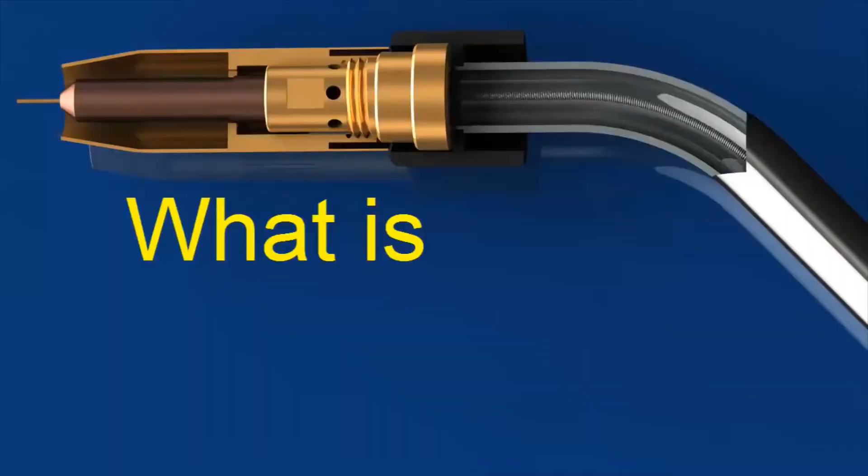What is MIG welding? MIG stands for Metal Inert Gas Welding. The American Welding Society calls this process gas metal arc welding, or GMAW. You might also hear it called wire welding.

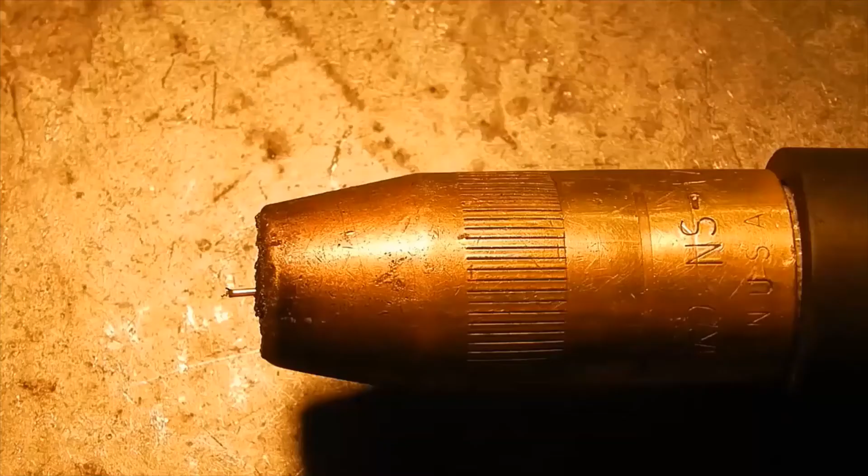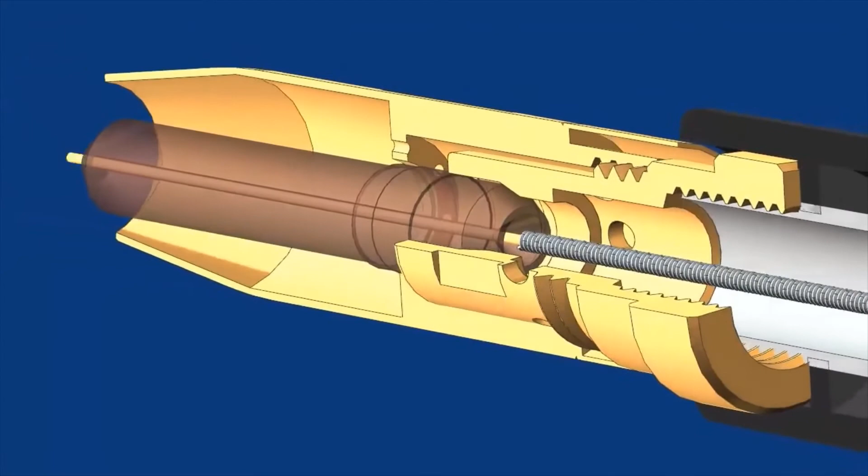In MIG welding, a thin wire acts as the electrode. This wire is fed from a spool mounted on a gun or inside the welding machine, through a flexible tube, and out of the nozzle on the welding gun or torch. The wire is fed continuously when the trigger on the welding gun is pulled.

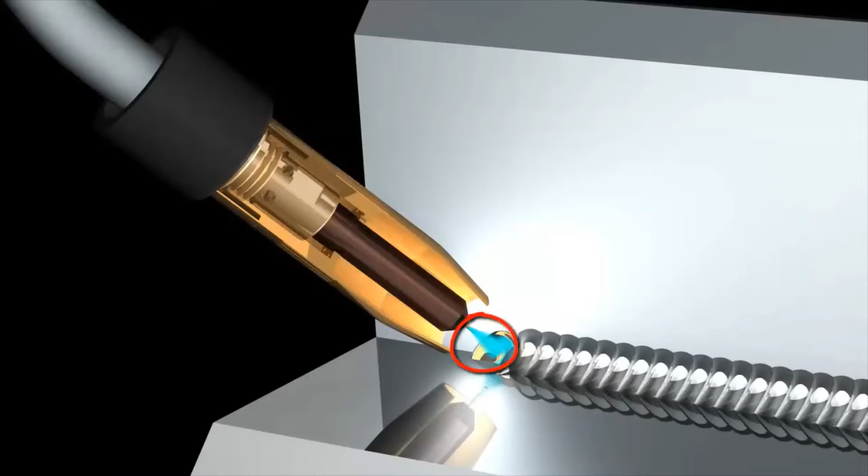When this trigger is pulled, it also switches on the welding current and a shielding gas. An electric arc forms between this wire electrode and the workpiece and heats both metals above their melting point. These metals mix together, or coalesce, and solidify to join the workpieces into a single piece.

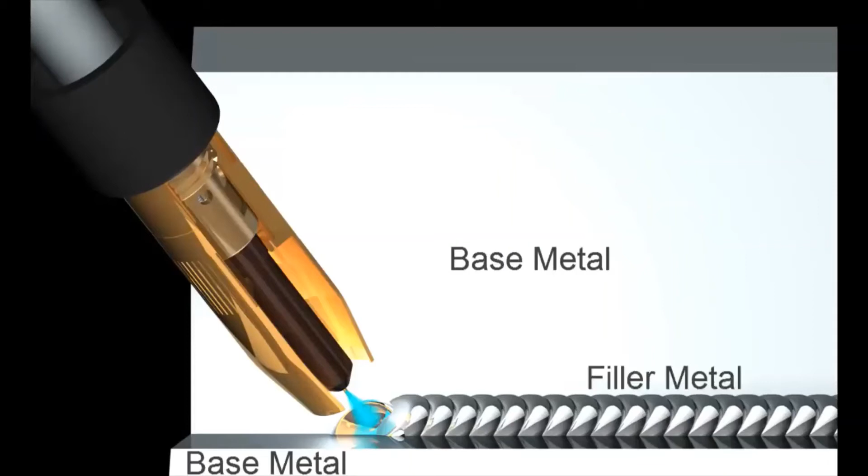The metal in the parts to be joined is called the base metal, and the metal that comes from the melting wire electrode is called filler metal. MIG welding always adds filler metal to the joint. Because the wire electrode melts as it's being used, MIG is called a consumable electrode process.

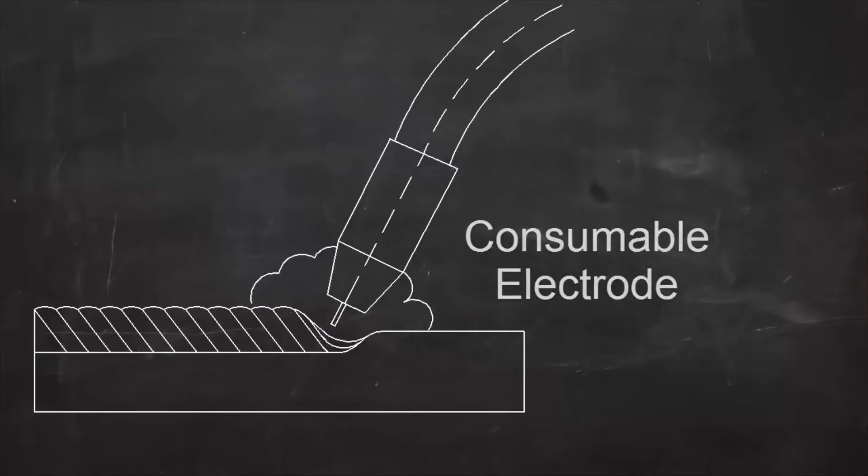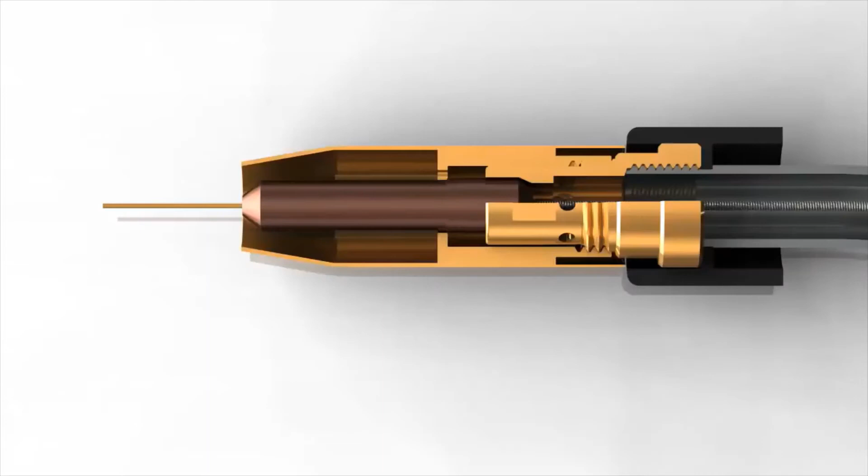Here's the MIG wire going through the wire feeder into a flexible tube, or conduit liner. The liner goes through the hose or welding lead all the way to the torch nozzle. At the nozzle, the wire is fed through a contact tip and comes out at the point of the weld.

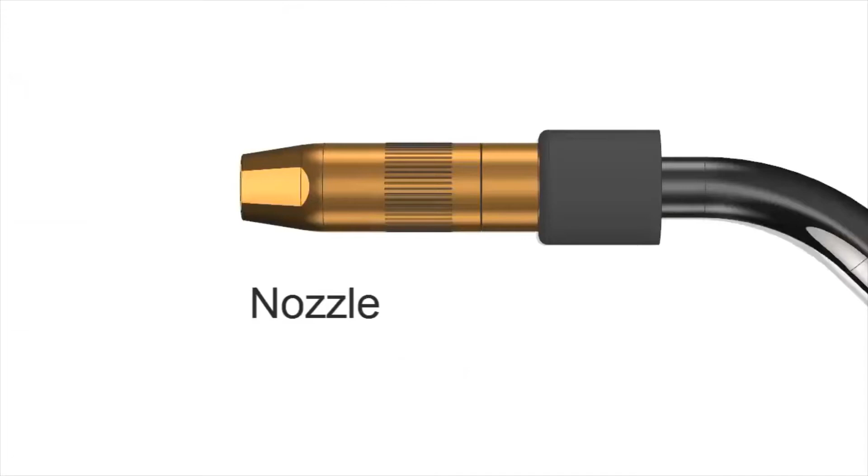Shielding gas is also fed through the welding lead. It goes through a gas diffuser and flows out of the nozzle. This shielding gas, which is often a mix of argon and CO2, protects the molten metal from reacting with oxygen, water vapor, and other things in the atmosphere.

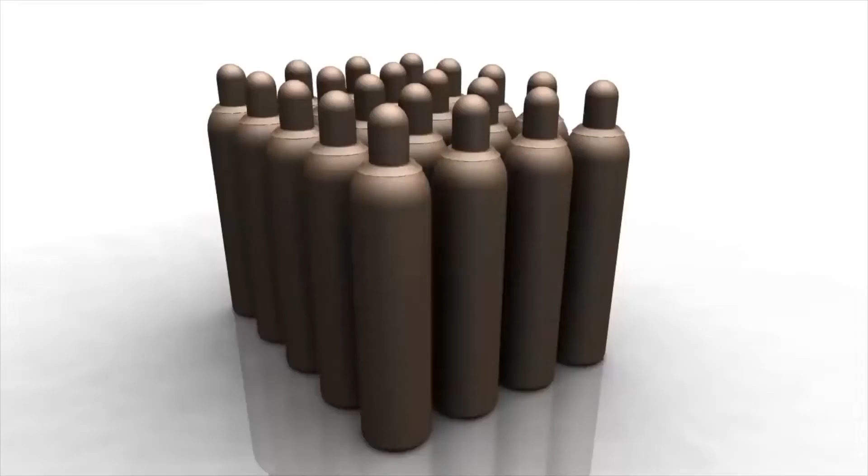The shielding gas is stored in high-pressure cylinders like these. The pressure is reduced to a usable level by a device called a regulator.

In MIG welding, all the machine controls are set on the machine itself. The most important of these are polarity, wire speed, and voltage. The trigger on the gun is just an on-off switch.

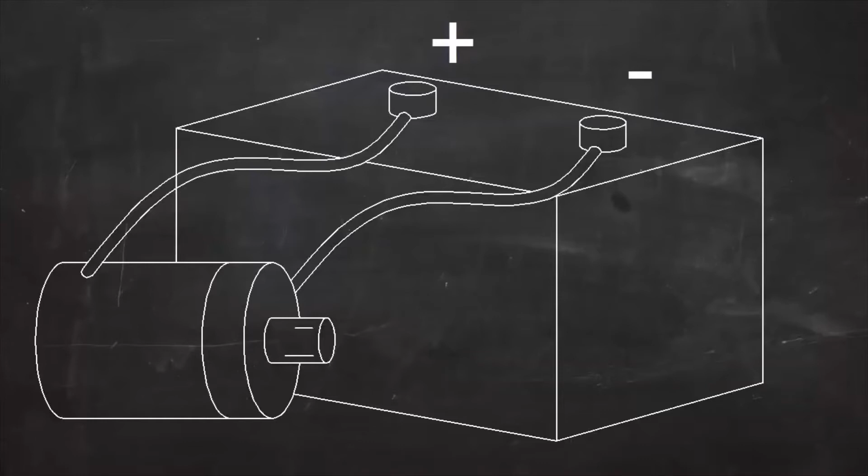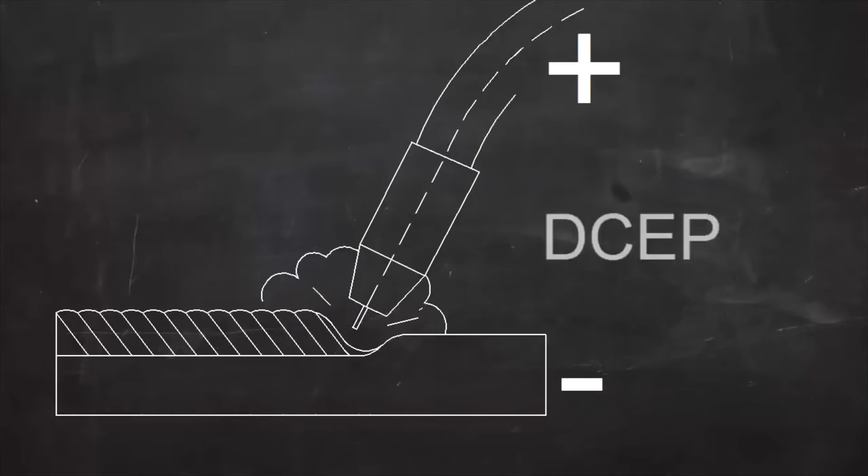For most MIG welding, the current is direct current, or DC. DC is like the current flowing from a car battery. One wire is always negative, and one is always positive. In DC MIG welding, the electrode is usually positive and the workpiece is negative. The term DCEP is used, indicating that the current is direct current and the electrode is positive. This is also called reverse polarity, but DCEP is a more descriptive term.

In an electric circuit, the current flows in a loop. In MIG welding, the current has to flow in a complete circle from the machine to the torch, into the work, and back to the machine. A work lead is clamped to the work to complete the circuit from the workpiece back to the machine.

So, in summary, MIG welding is an electric arc welding process. It uses a consumable wire electrode. Filler metal is added automatically, and the shielding gas comes from a high-pressure cylinder.

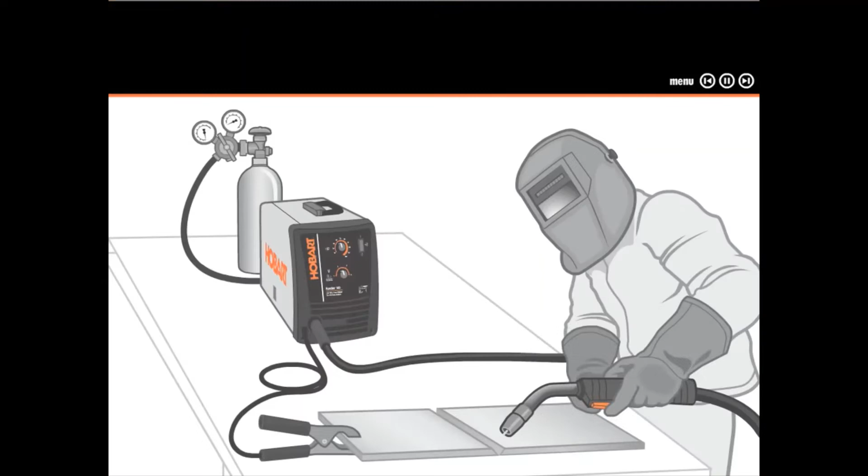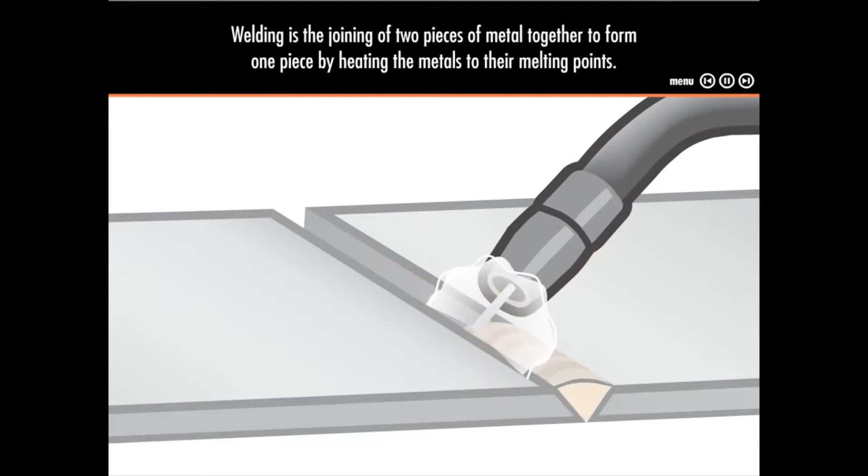What is welding? Welding is the joining of two pieces of metal together to form one piece by heating the metals to their melting points. Additional metal, also called filler metal, is added during the heating process to help bond the two pieces together.

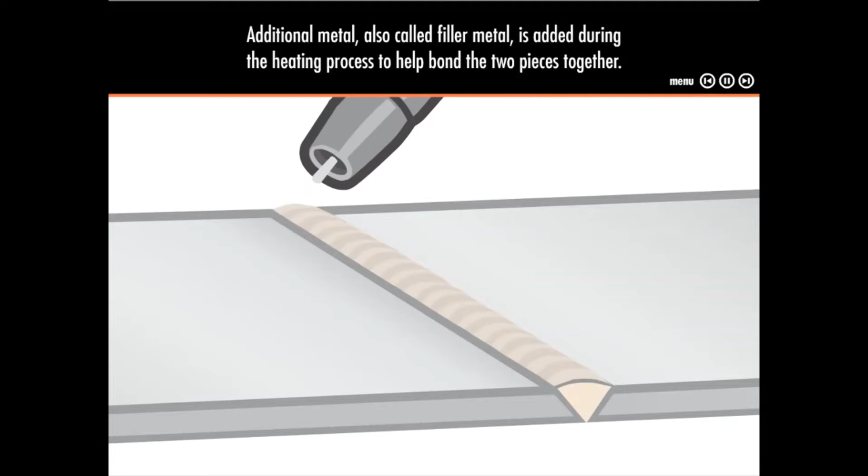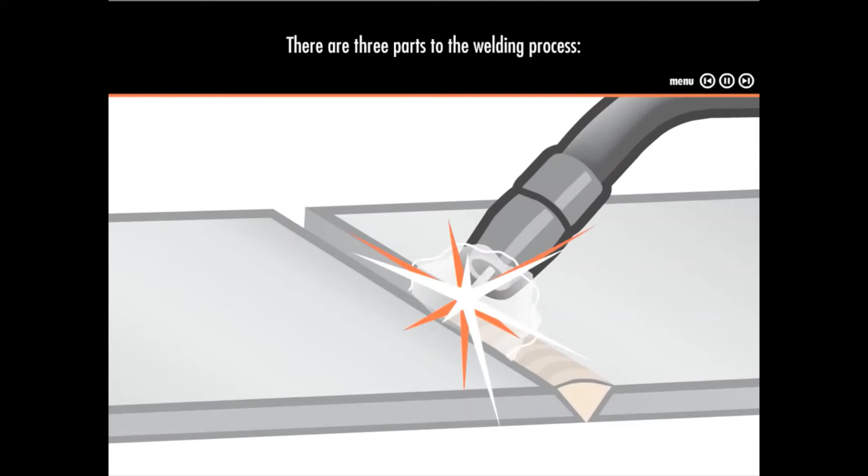A welding machine is used to create the heat and apply the filler metal. There are three parts to the welding process: the welding arc, the filler metal, and shielding the weld. First, let's learn about the welding arc.

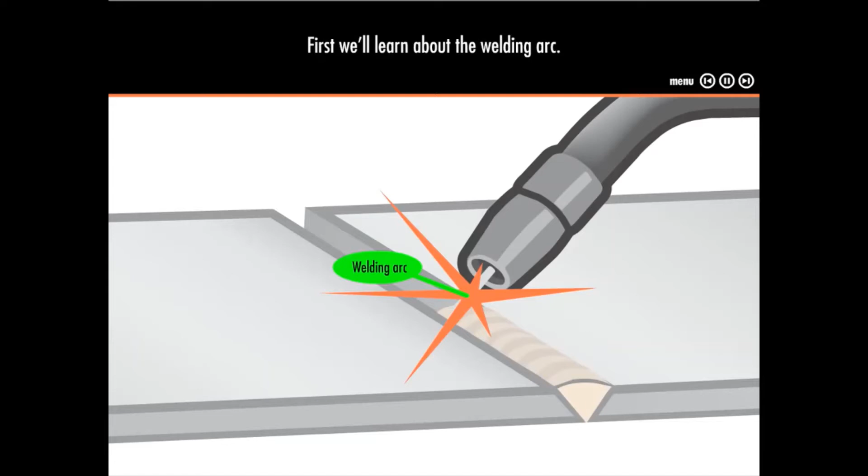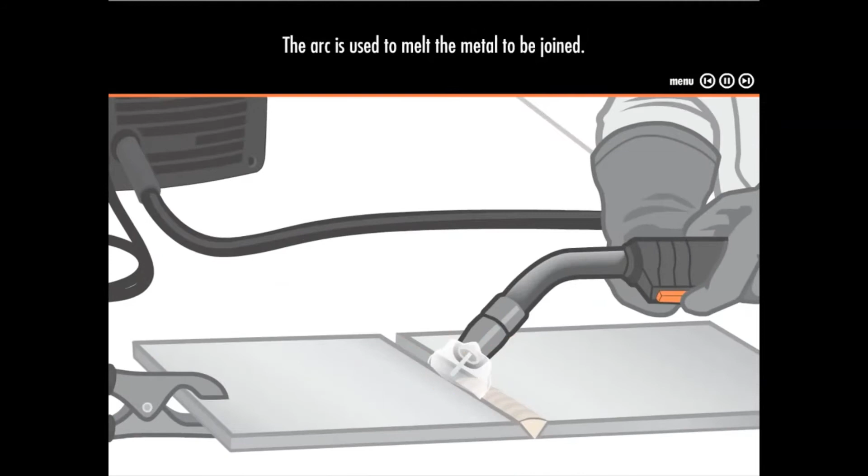Welding machines create an electric arc, similar to a continuous spark, that comes from the electric circuit created between the machine and the metal being welded. The arc is used to melt the metal to be joined. The arc creates heat up to 6,500 degrees Fahrenheit.

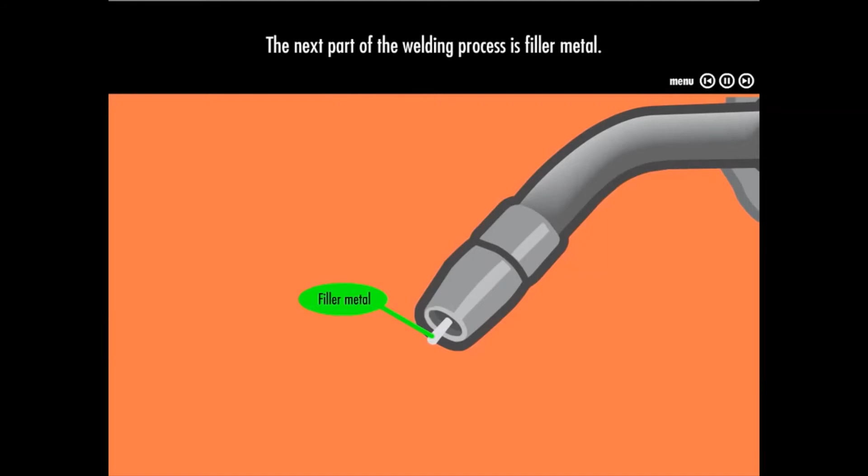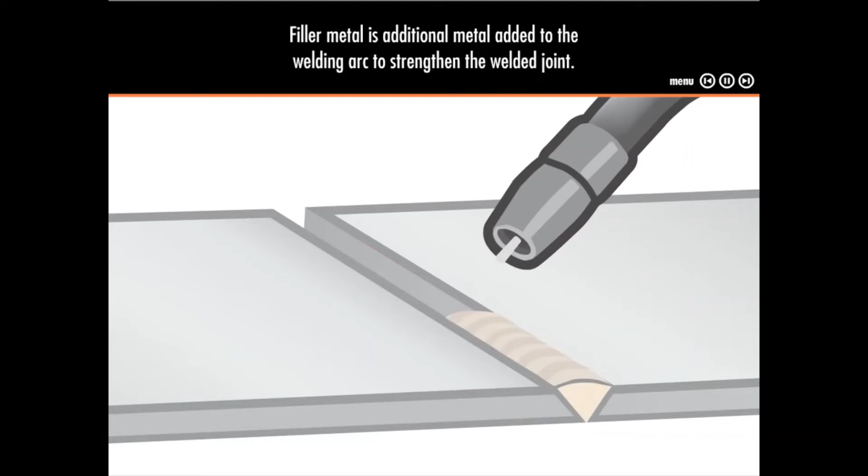The next part of the welding process is filler metal. Filler metal is additional metal added to the welding arc to strengthen the welded joint. There are two basic types of filler metals used in welding: welding wire

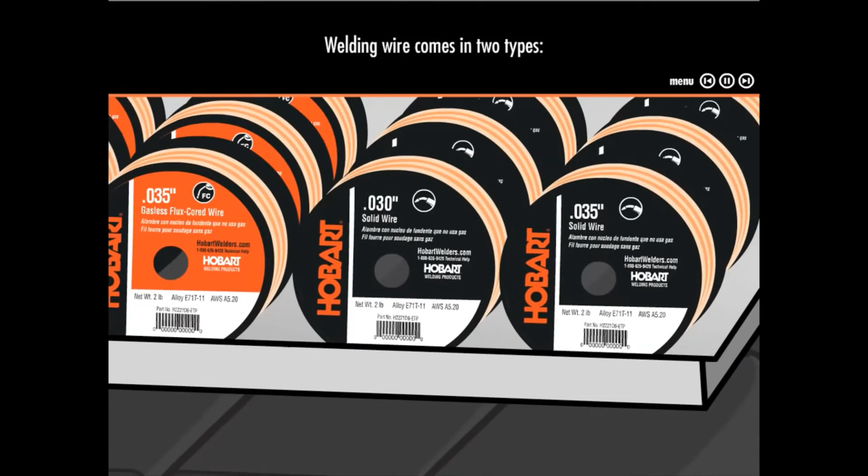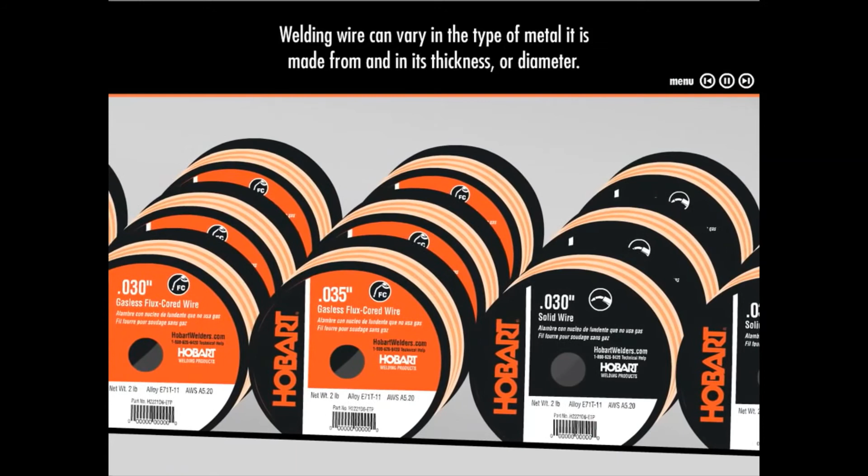and stick electrodes. Welding wire comes in two types: solid wire, also called bare wire, and flux-cored wire, also called tubular wire. Welding wire can vary in the type of metal it's made from and its thickness or diameter. All welding wire is packaged in spools and is easy to find on the store shelf.

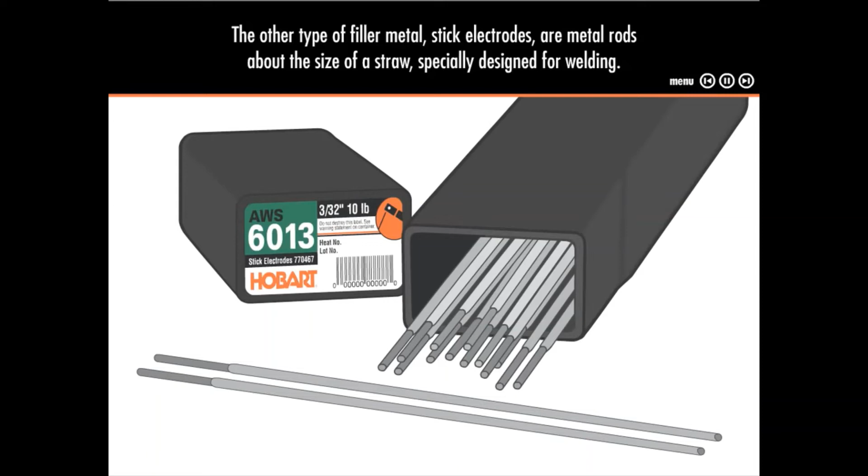The other type of filler metal, stick electrodes, are metal rods about the size of a straw, specially designed for welding. Stick electrodes are packaged in boxes and can vary in diameter and composition.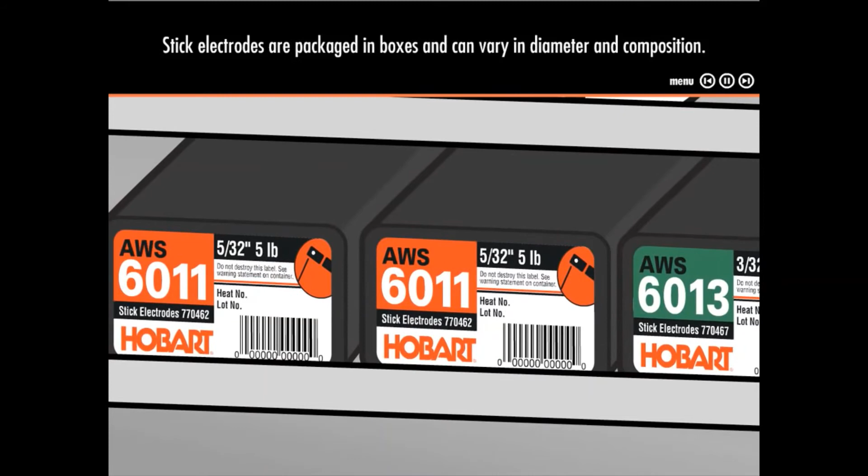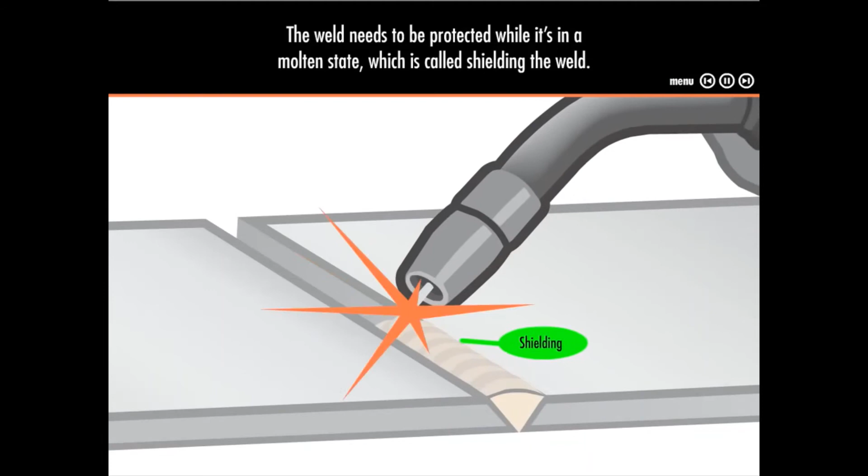The final part of the welding process is shielding the weld. The weld needs to be protected while it's in a molten state, which is called shielding the weld. The surrounding air can contaminate a weld, causing it to weaken. Shielding gas covers the area where the filler metal melts until the weld can set up.

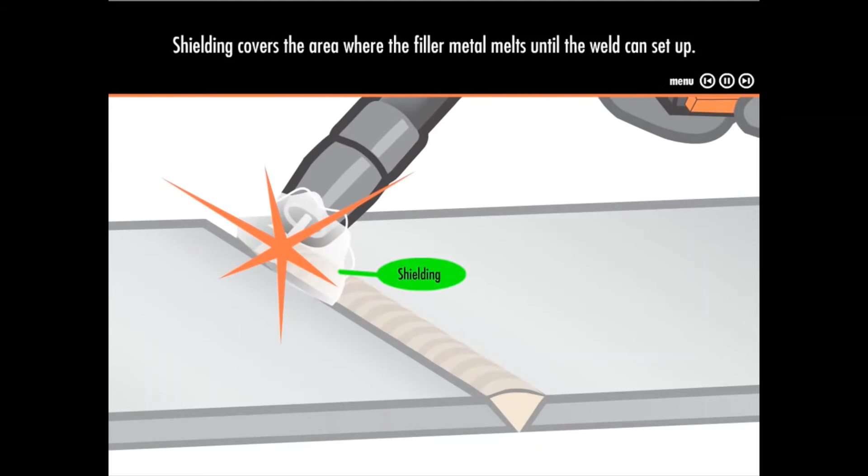The shield is created by using gas added to the welding process. The weld sets up in fractions of a second, so not much gas is needed.

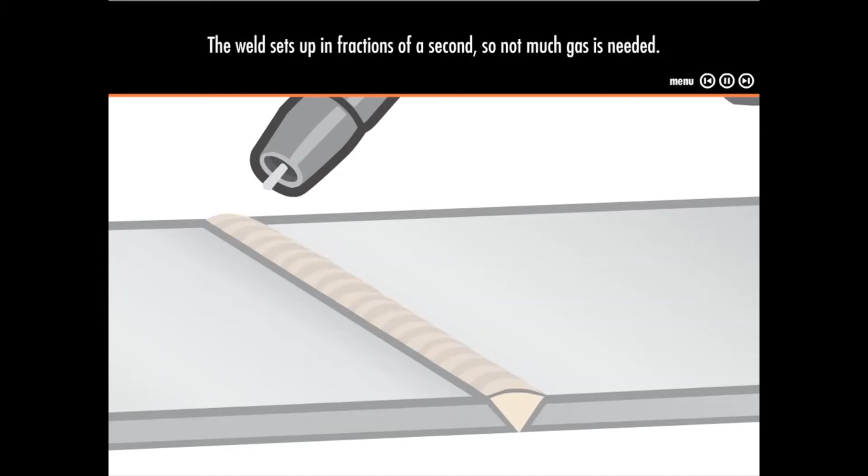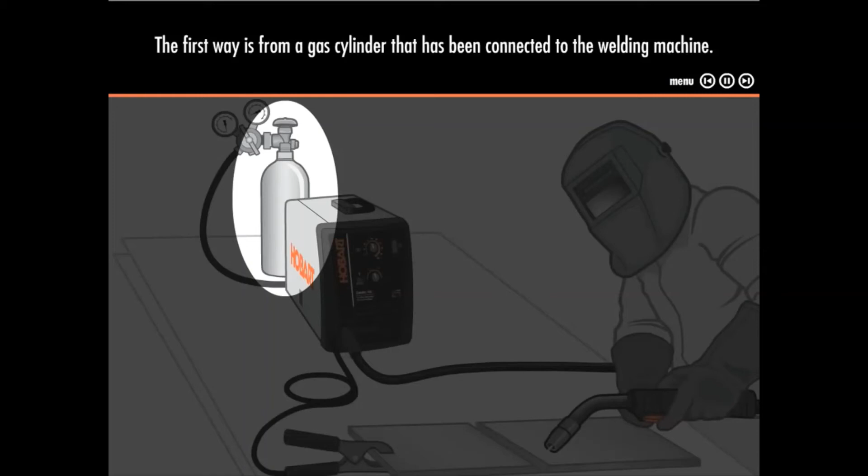Shielding gas is delivered to the welding area in one of two ways. The first way is from a gas cylinder that has been connected to the welding machine. This is the standard method when solid or bare wire is used.

The second way is from a special chemical that's been added to the filler metal. This chemical releases the gas as it melts. When these filler metals are used, no gas cylinder is needed. All stick electrodes and flux cored wire are used without a gas cylinder.